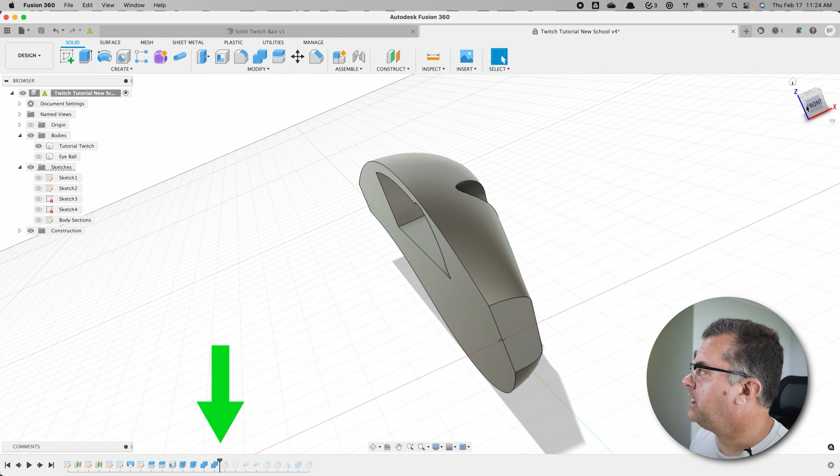Let's go. I think I want to come back all the way basically before that eyeball gets in there. So sometimes this is tricky because you have to move stuff around. My eyeball comes in here, but I combined all the bodies back together at this step. And what I want is the bodies combined, but I don't want the eyeball there.

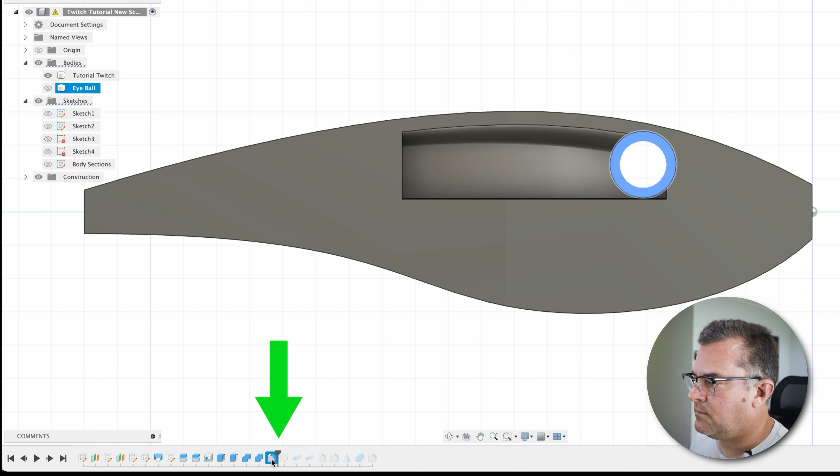So let me show you a little trick you can do. I'm gonna come up past this fillet area here, take this, and drag it to there. Now what I've done is I've switched these things around, so I'm actually combining the body here and then I take the eyeball out there. So what I can do now is come in here, and I'm at the point I want to.

Now, I just caution about moving things too dramatically around the timeline. You can really mess things up, but usually if the steps aren't dependent on another step you're getting out of order, it'll work just fine. Just use caution. So now I'm here, I don't have my eye in there, which is cool, and we're ready to go.

So what I wanna do is create a sketch on the face of the body. I'm gonna make an offset, select the outline of the lure body, and offset in probably like -0.4, just slightly, trying to keep everything inside that body because we're gonna be doing some extrudes and we don't want to come outside the boundaries of this object, since we're gonna extrude from object. You'll see, okay, that's good.

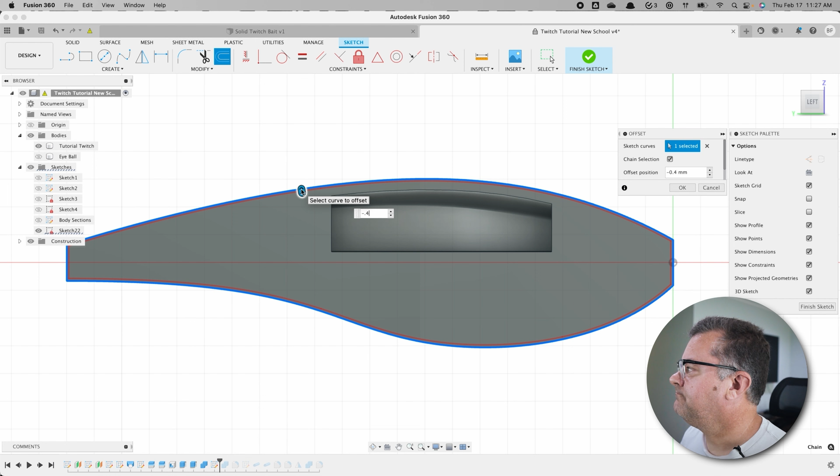Now I can actually turn off that, so I just have this sketch. So now we're gonna mainly focus on the head section first. I like to start by defining the back boundary, how far down the lure that head section goes, and then I'll add my details in there.

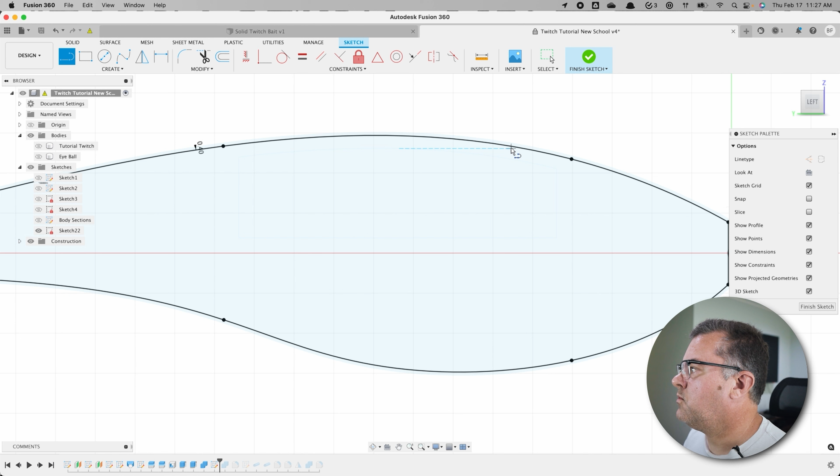I've been getting into a more angular head design. So I'm popping back on this body, and I just know my eye is kind of right here in this front section, so I want to keep that in mind because I want the eyeball to be inside the head. I'm just gonna go super simple here and make that kind of section, and then we're gonna start adding our details here.

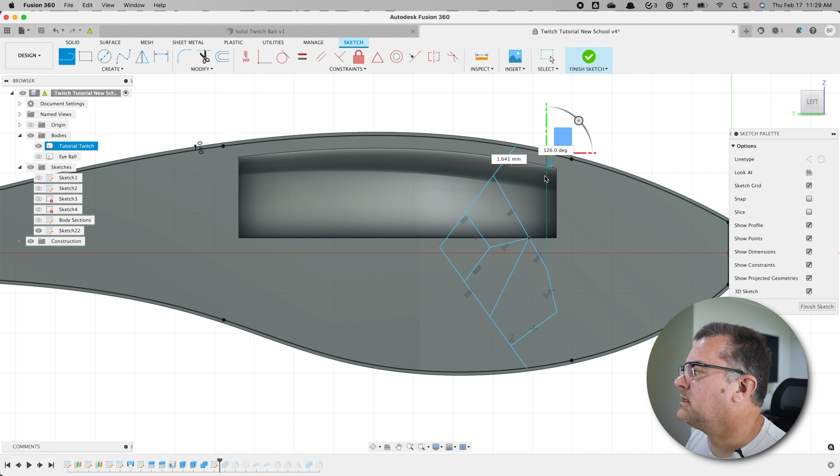Again guys, this is all about art and making what you wanna make, so don't get too hung up on the way I'm doing it here today. It's just kind of a phase I'm in — angular gill plates, yeah, deal with it. You can of course make these any shape you want, they can be rounded, whatever you want, it's all you. If you're following along at home, I'd just kind of chill out for a bit till you see what we're gonna do, because it'll make much more sense once you see how we're gonna use these things.

I'm gonna keep them big and chunky. I don't like to put super tiny little details in my lure designs, but if you do, you can go absolutely crazy here. But again, I'd suggest you watch my process before you get too crazy.

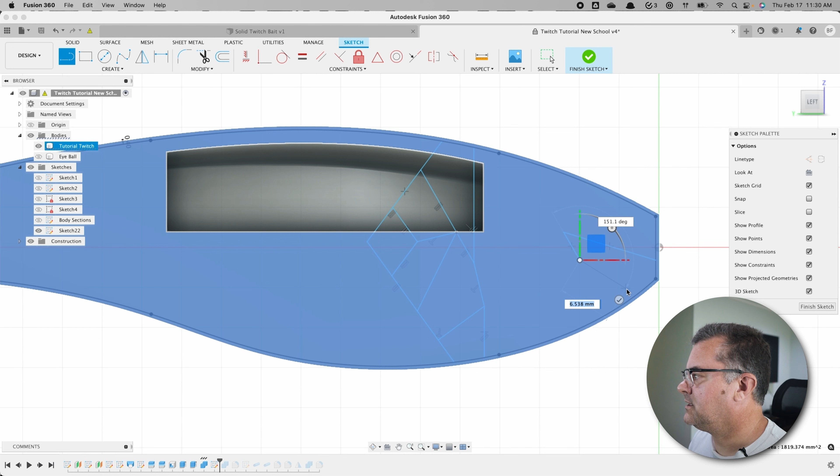All right, let's put a mouth on. I don't usually do mouths, but let's just add one for the fun of it. Can I make one that looks scary? Probably not, I'm not good at that stuff. But we're staying with an angular pattern. Okay, that looks good. Let's add a fin here — we're gonna go super basic.

Okay, again, keeping it simple, bro. And then I'm gonna do a lateral line. This lateral line does a couple things. One, it's gonna be part of the design on the lure body, and I'm also going to use it to split the lure when I start to do the body details.

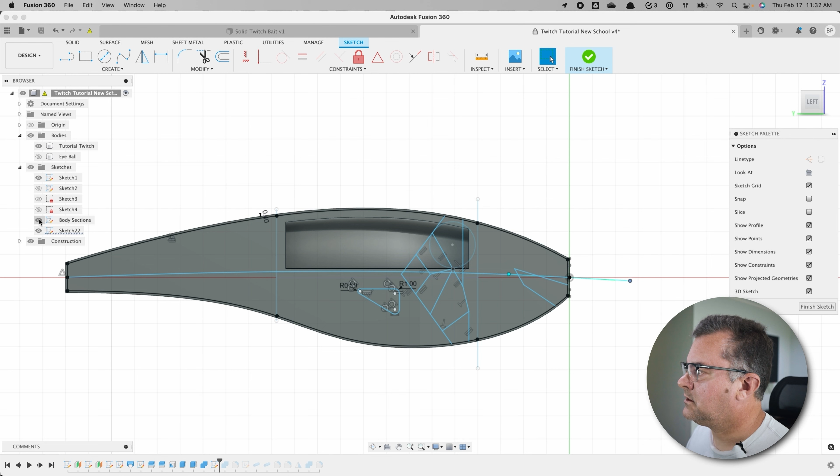All right, fit point spline here, there to there, and give it just a little bit of a curve. You can do whatever you want to here, right? It's your lure, bro, you do you. Now I should have labeled my eye sketch in here somewhere. I don't know if I have it. Yeah, there it is, so I can see where my eye is gonna be. And that looks okay-ish. We'll give it a roll.

All right, now we can finish sketch and we're gonna extrude. So I'm gonna hit the E key on my keyboard and we're actually going to extrude all of these sections in the head area first. Again, this is where adding too many details can really drive you crazy.

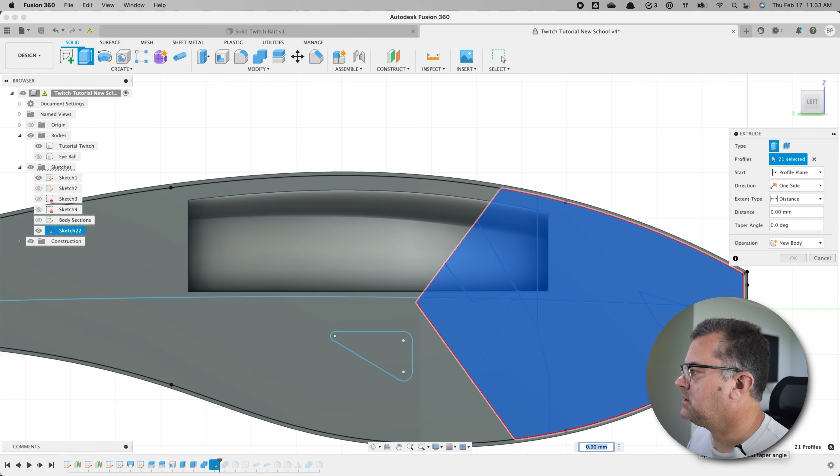All right, got all of those sections done. So there's two ways you can approach this. If you want to create a kind of separate shape from the main lure shape for your head, you can extrude this from the profile plane. And I'll show you what that does real quick.

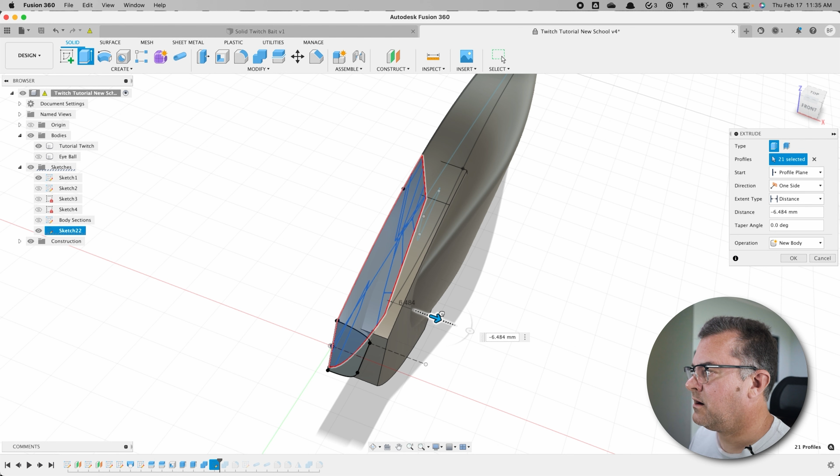So if I extrude this out, I just grab this, move it over, and I want to do a new body. We're going to do a new body on a lot of stuff. And so what I kind of look for here, and it's kind of difficult to see, is you want to keep it roughly in the same nose width here. We have some play since we made a new body to change that angle of this. And so this is not a super scientific way to do things, so you just kind of have to guess here. You don't want to go way out here probably, but you want to kind of go somewhere in betweenish, if you will.

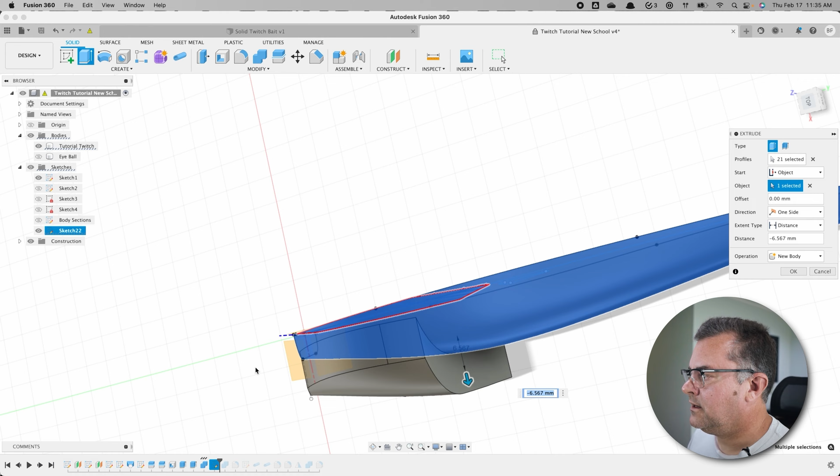Okay, but let me show you the other thing to do. The other way to do it is instead of profile plane, do object and select this object. Now look, what that does is it keeps all of the curvature of the body. Let me see if I can get a good angle here. So we keep the curvature of the body and the relative shape. And obviously we don't want it to be that big. You usually want it to be, oh man, you kind of have to play with it, but usually not much more than 1.

Now we have to do negative because we drew on this face back here. If we drew on the plane, this would actually be a positive number. So you can kind of tell when you're doing it if it's going the right way or the wrong way, but just wanted to let you know.

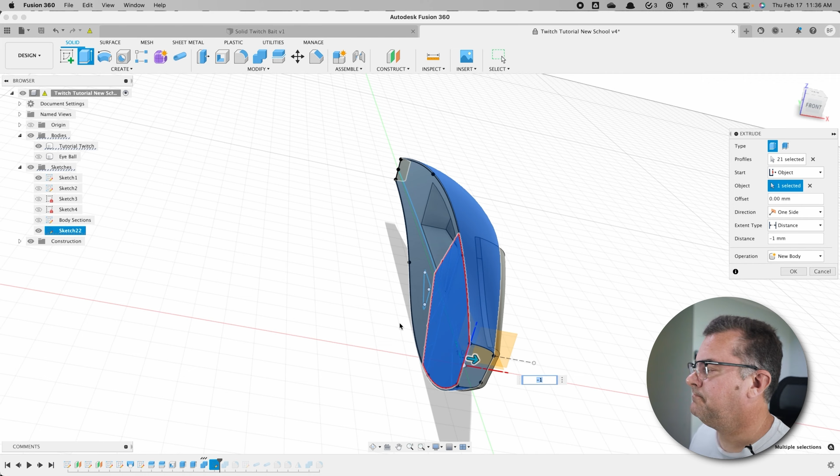Okay, so now we have this kind of little guy here. And one thing that this method gets you that's a little bit funky is this edge up here, but we can take care of that, I'll show you how. And the most important thing here is the new body. All right, now I have this body 59. I'm gonna rename it to head because that'll make it easy later.

Okay, now let me show you something that I learned recently that kind of blew my mind. If we click move copy and we select faces, you can actually select this face right here. You select the top view, grab this and move this around. That's pretty cool, bro. And that's really why we made this a new body.

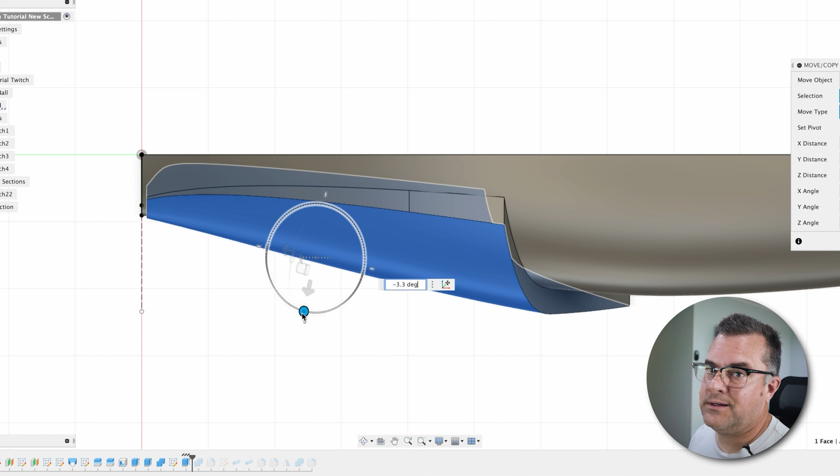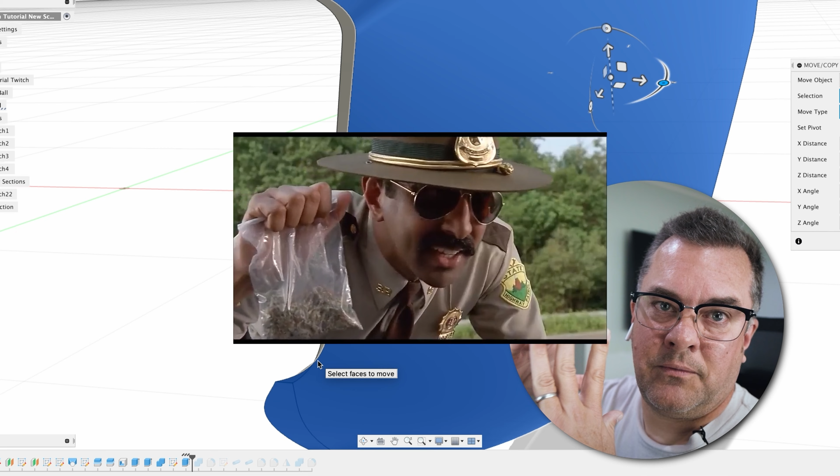If we would have joined it together at that point, you would run into all kinds of problems at this point. So you can't go too far past where it starts to crush this edge right here. And what I mean by, let's turn off the main body here. So this front edge can't go past itself, right? It can't fold over itself. Fusion doesn't like when that happens, and it won't kind of adjust, if you will. Like what I would want to happen is it just keeps collapsing and moving up the seam and doesn't fail. It just gets to a certain point and stops.

Officer Rabbit and I are going to stand here while you three smoke the whole bag.

And so what this does is now we've widened the back, we've flattened down the front, and we say okay. And it gets this edge much, much closer. And again, we have room to play with this, so don't freak out yet.

Okay, so now what we want to do is we want to turn back on our... actually, you know what I want to do is I want to rename this to details because that will help us later. And we want to turn that sketch back on and we can turn off our body sketch. And now we start building the gill plate section. So we're going to hit E for extrude. And I like to start kind of at the ones closest to the front of the bait, so we'll select this one.

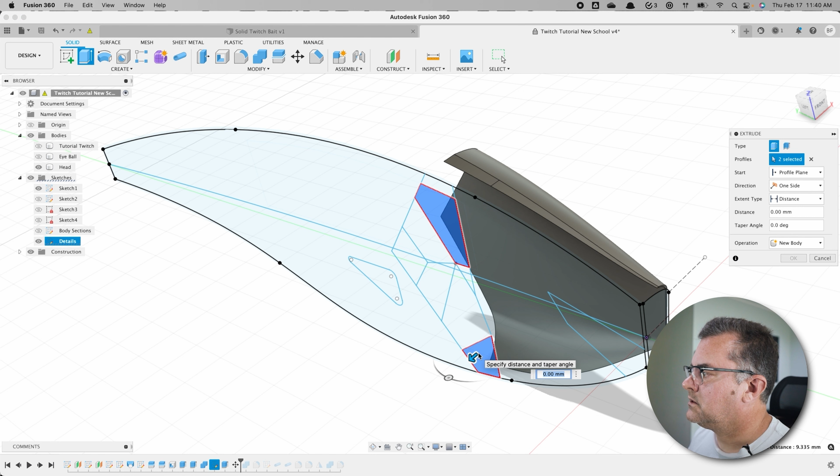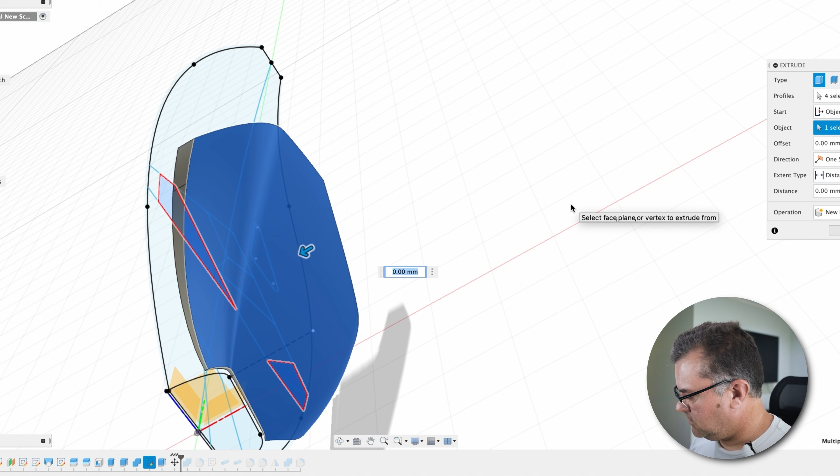Let's select this one and this one. Actually, let's make this whole section one, because if you made a bunch of little ones, it gets tricky. Then we're going from object, select this object, and our distance is going to be - you want a stair step, with the ones closest to the front of the lure lower, and as we go back they get a little higher. So this is probably gonna be negative 0.4. You can see they just come out from there.

We actually want to make these new body again, and I'll show you why in a sec. Remember that 0.4. Now we're just going to keep going down the line, so we have these sections here and in this section. We're going to do object, select this object, and let's do negative 0.6 maybe, and new body. We'll say okay - you can see where we're going.

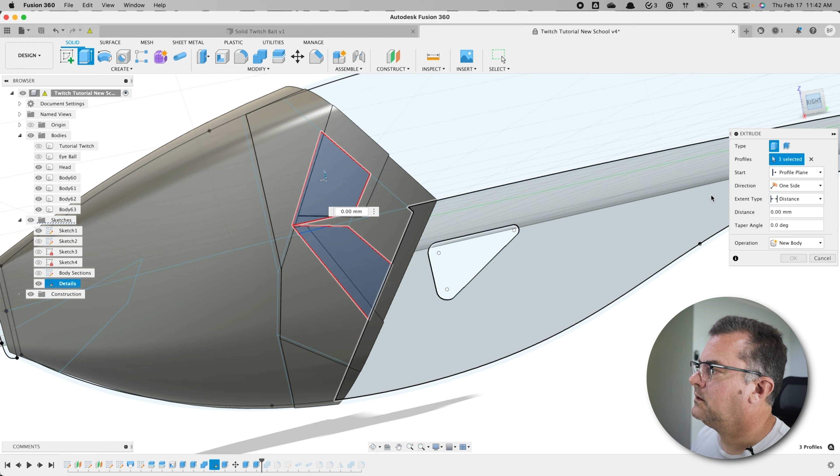So we have these lower sections that I did here, and then these new bigger sections here. Alright, we're gonna keep going - extrude this, this, this maybe. I think that'd be kind of cool. So we can come back to the front here, or the right, excuse me. Take a look at that. Okay, we already popped that one out.

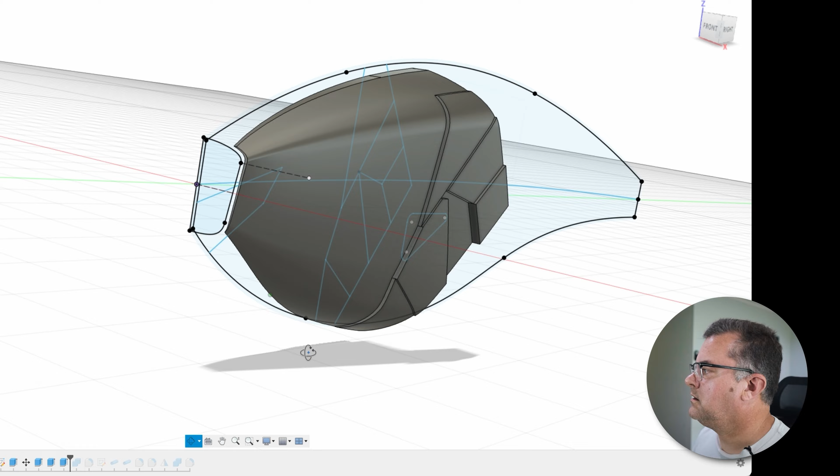I think we just want to do this diamond section here, right? Not this section. Okay, so from object, select that object, and let's do negative 0.9. That's good, we're gonna do new body, click OK. Alright, so we got this little section here - that's this guy, right, that I forgot to do. Just the same process: extrude, object, negative 0.85, new body.

Alright, so let's make it a little bit easier. Now I have all of these bodies over here, and the reason we made them new bodies is to make this part a little bit easier. I'm gonna come in here, turn off my head section, grab this edge, and hit fillet, maybe 0.5 - just round these edges over, at least the leading edge here, the edge that's closest to the head.

Kind of just like that, and you could obviously do this on all of these other edges if you want to. Because they are individual bodies, it makes it a heck of a lot easier to do this. If this was all one big joined body, Fusion gets super confused because you have too many surfaces involved, and all kinds of wackiness happens. So let's not do that.

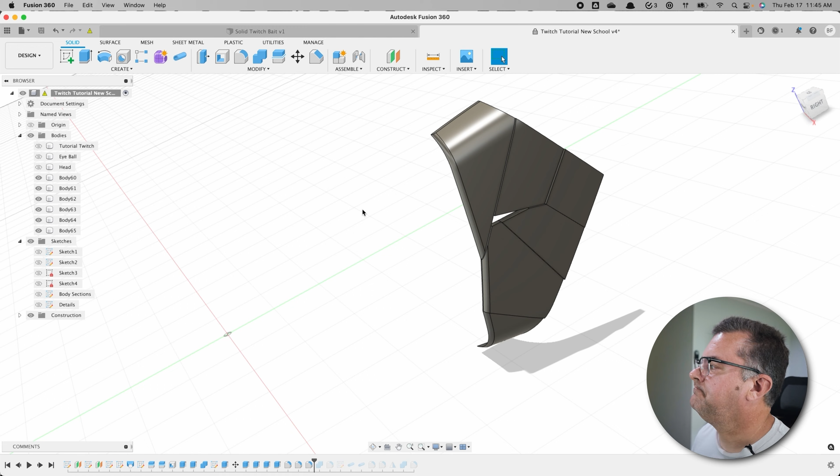Okay, and I actually think what I'm gonna do is - I like this, I kind of like that little missing section in there, I think it's cool. I'm actually just gonna combine all of these guys together, join them, don't want to keep tools, and we're gonna call this gills.

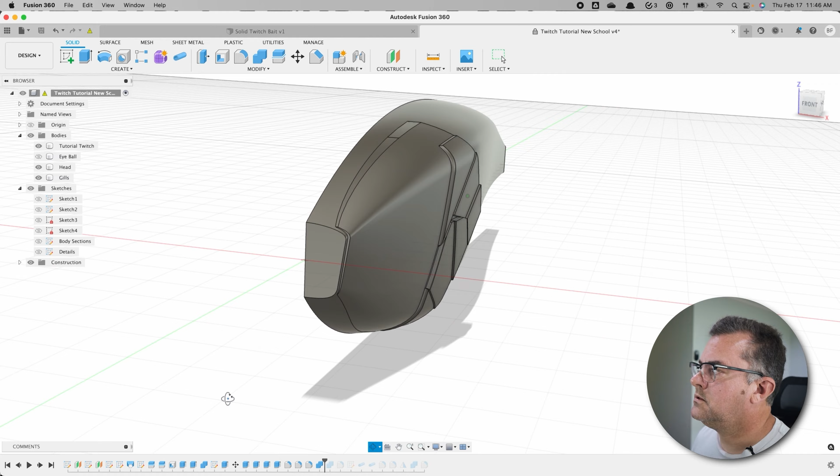So we turn back on our head - there's the head - and we turn back on the tutorial twitch. That's what we're looking like now, right? Not too bad, not too bad. Okay, pretty cool, pretty cool. Why am I talking like that? It's ridiculous. Okay, so let's keep going.

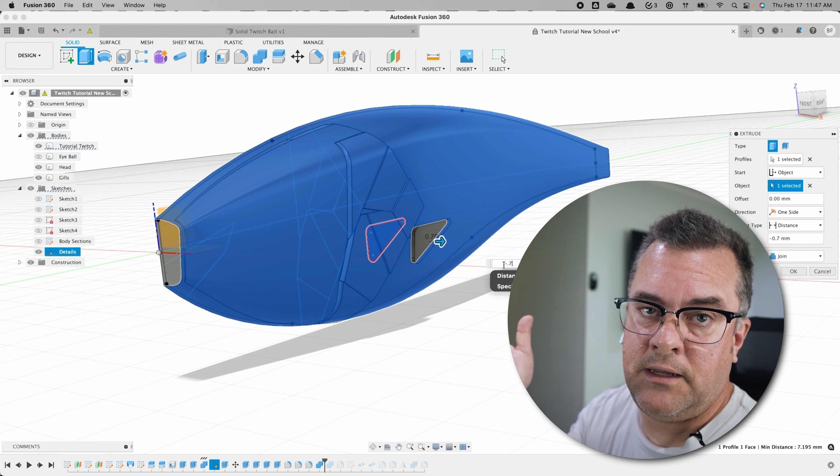Let's do an easy one here. Let's turn back on our details. Let's extrude, do this guy. We're gonna go from object - see a pattern coming here - and we're gonna do negative 0.7. If you haven't figured it out yet, I didn't make it clear at the beginning, that distance is how far out from the body this particular feature is going to be. It's up to you how big or small you want to make it, but that's what this is for.

Alright, we want to make a new body again and click OK. Then we're going to angle this out just like we did before with our move command - faces, select this face, and just give it a little bit of a tweak. You know, you can play with this all day long, so let's keep it about here. Alright, I think that looks good.

And then one other thing you can do, that we can't do if we join these together, is I can actually go to move bodies, select this, and just kind of bump it back into the lure a bit more, right? So I can even have finer control over how I want this to look. I mean, that's the most boring fin ever, but you get the idea.

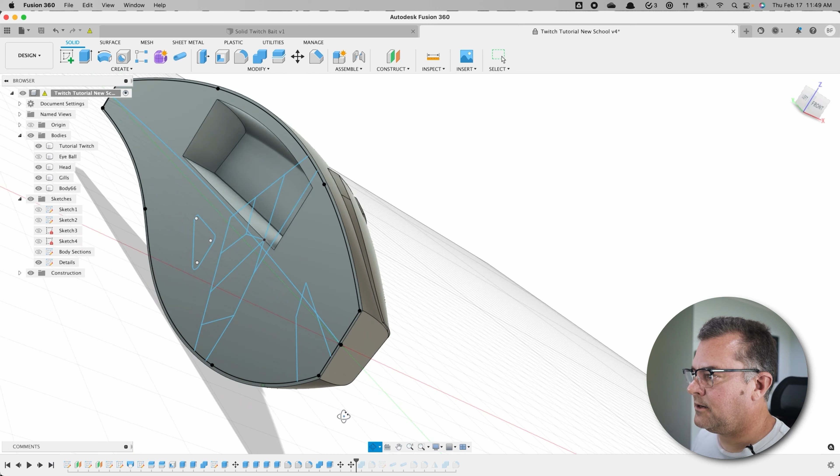Alright, and let's see how this mouth looks now. Like I said, I'm pretty terrible at mouths, I don't do a lot of mouths. We're gonna do object, select our head here, negative 0.5 maybe. Oh, we ran into a bit of a problem there, because this head section actually got shrunken in, and so this outline is outside that head section.

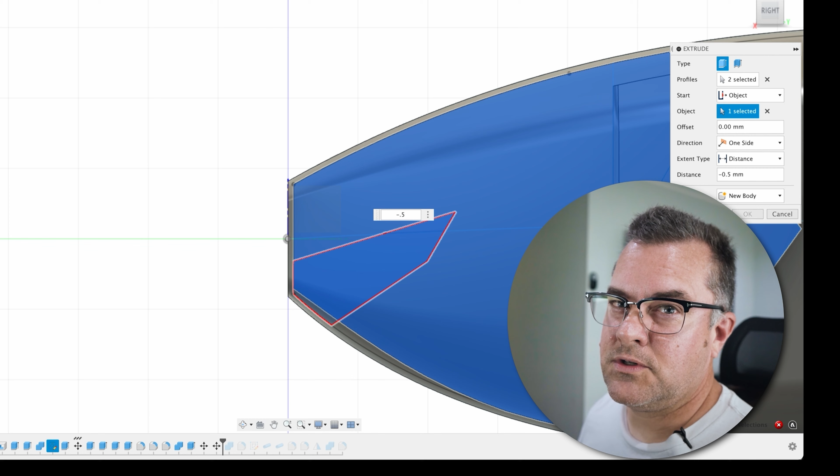So we can solve that pretty easily later, so we're gonna skip this step right now. That's one of the problems you can run into with this technique, but again, it's easily solvable. It's just more of a sequencing issue.

All right, so now we got our head on there. This is pretty far out actually. What you can do is move bodies, select the head and the gills together and move them all in there. That looks pretty good. We're gonna change the top here too, but take your time, figure out what you want this to look like and just move it into place.

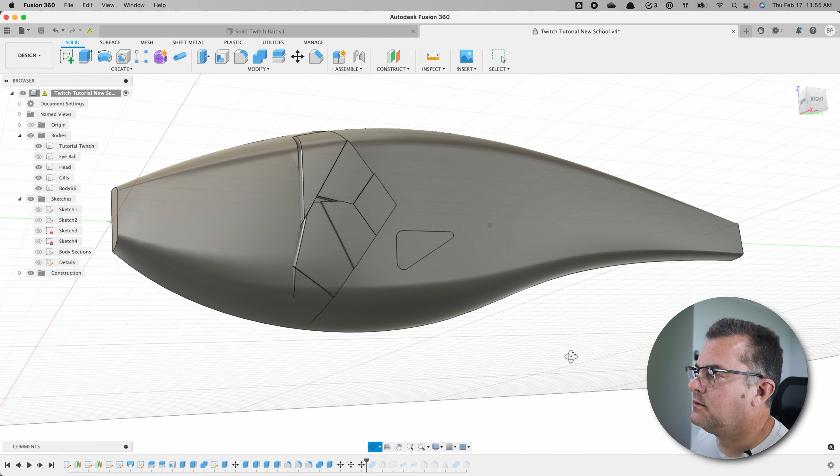So it might be hard to see, but there's this little edge here that flows back. That's the original part of the lure kind of taking over. I still got plenty of stuff out there, I'm good there, click OK. So now we have kind of a much more natural fade in, if you will.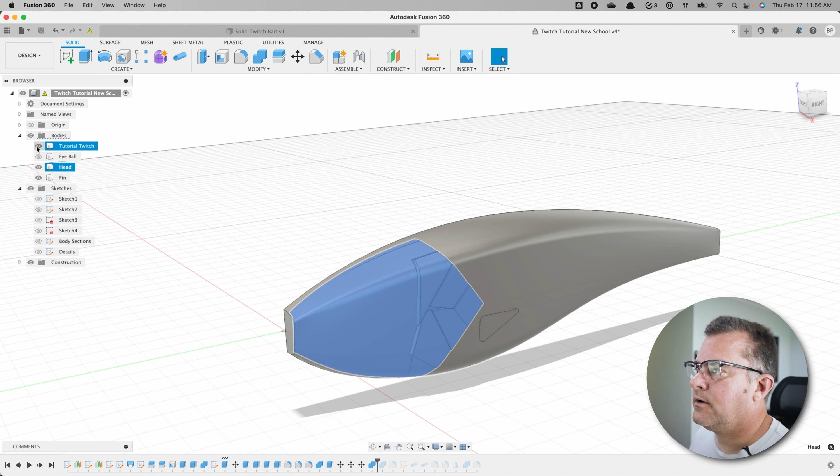What I want to do is, I don't really like this, the way it wraps up here. The bottom actually came out okay, I'm not too terrible with that, that looks all right, but I don't like this up here.

So the quick and dirty way to get rid of that is just to create a sketch on this plane, and we're just going to draw a line. It goes about right there. Again, it's art, people. Finish sketch, then we're going to use the split body command. We're going to split this body, use this tool and click OK.

Okay, so now I have head 1, which is the main head, and the top half. If I just hide this body, bring our tutorial twitch back on, you can see now that kind of fades in a little better, right? So you can adjust that however you want.

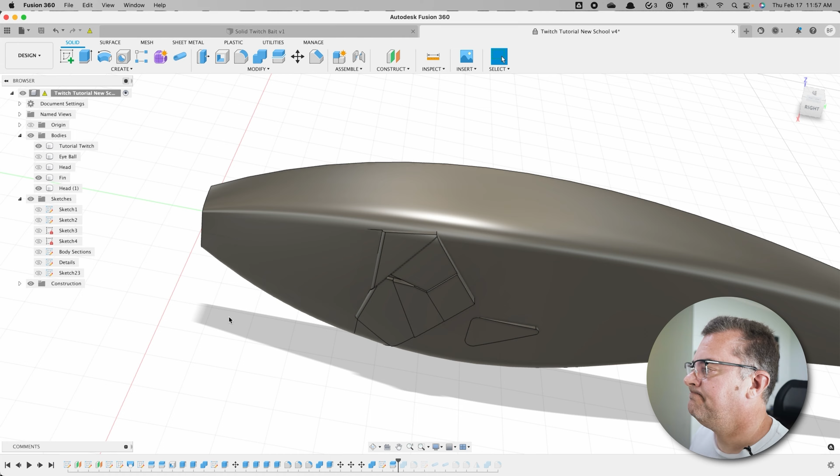You could use a curve splitting tool if you want to. Anyway, it works, right? Or you could leave it like it was before, totally up to you, bro. All right, that fin's really pathetic, but okay.

So now let's get back to our mouth. Let's add the details, sketch back in, hit the extrude button, click this, and we're going to hide the head thing here, from object, boom.

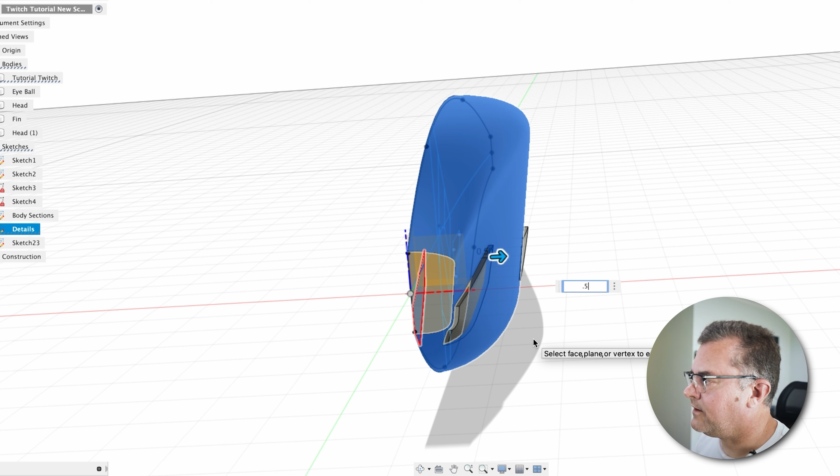Again, let's just say negative 0.5 maybe? Oh no, we don't want negative 0.5, we actually want 0.5, don't we? Duh. And we do want that to cut, and then we just want to be done. All right, that's pretty ghetto, bro, but you get the point.

If you wanted to, you could get in here and fine tune your sketch. You can go back to your details sketch and edit it, and basically just add a line maybe here to there. And then when we go to our extrude, we'll just edit feature, and we want to make sure we unselect that bottom part, select that, click cut, okay.

All right, that almost looks like an eyeball, but you get the point, right? We can just cut it out from there and we're good.

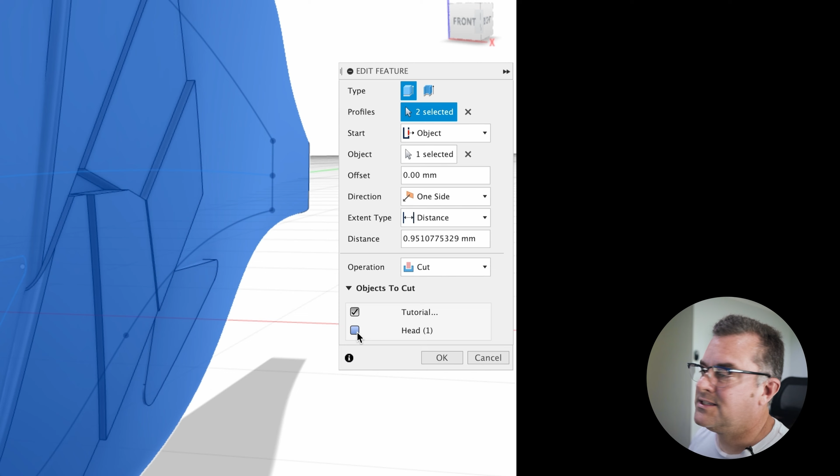So I don't know if you can tell, but in here we have, see how it's kind of shaded? We actually have the head thing poking through. So when you come over here, objects to cut, pull that down and you can see all the things that the profile actually goes through. We actually want it to cut that head section as well, right? So you can use this to only cut certain parts. It's pretty powerful once you get used to using it.

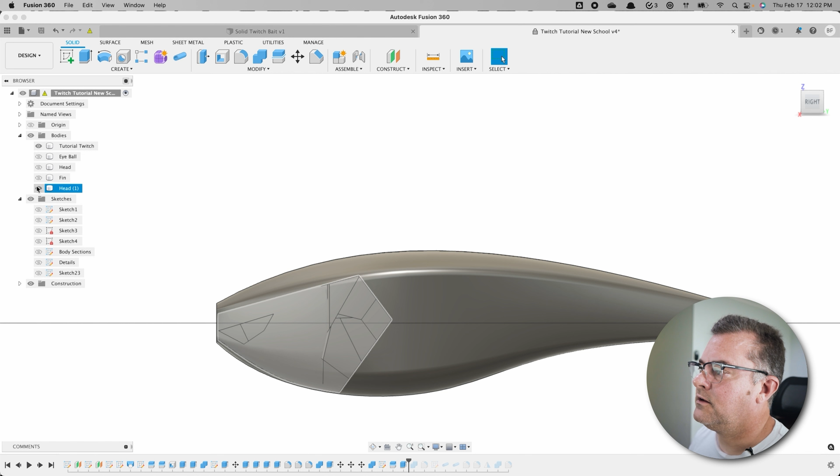I apologize, that's a terrible, terrible mouth. Okay, so now what we're gonna do is I'm actually going to combine the main body. So I'm gonna turn off our fin and turn off our head for now. And we're gonna split the head off and split the body into multiple pieces to add our other details.

So if we click back on this sketch and we click split body, click that body, my splitting tool is gonna be this outside drawing here, right? And click OK. All right, so now we can turn that off.

So we got the main head of the lure out of the way, and we're gonna split it again. This body, the split tool is gonna be the lateral line we put in there, and click OK. And we wanna get that detail sketch out of the way, and then we wanna figure out what's what here.

Okay, that's the bottom. So I just renamed that Twitch bottom and Twitch top.

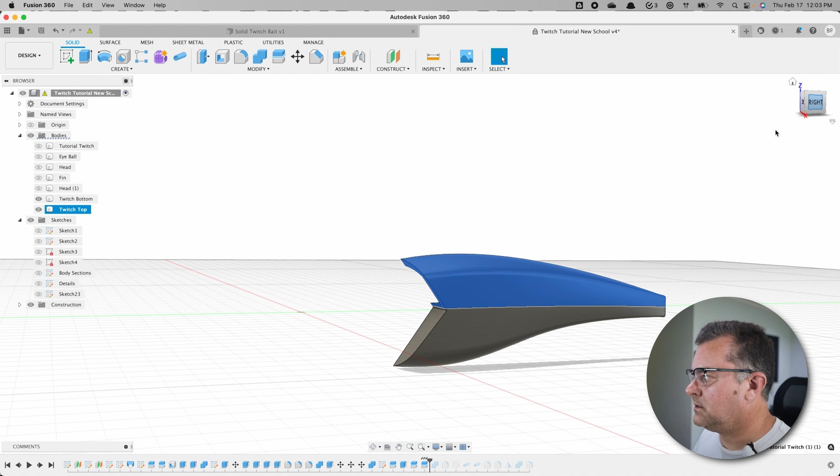Now what we're gonna do is a hatch pattern across these guys. I want the bottom to be just these lines going that way, and on the top we're gonna do the hatch. So we'll start with the bottom.

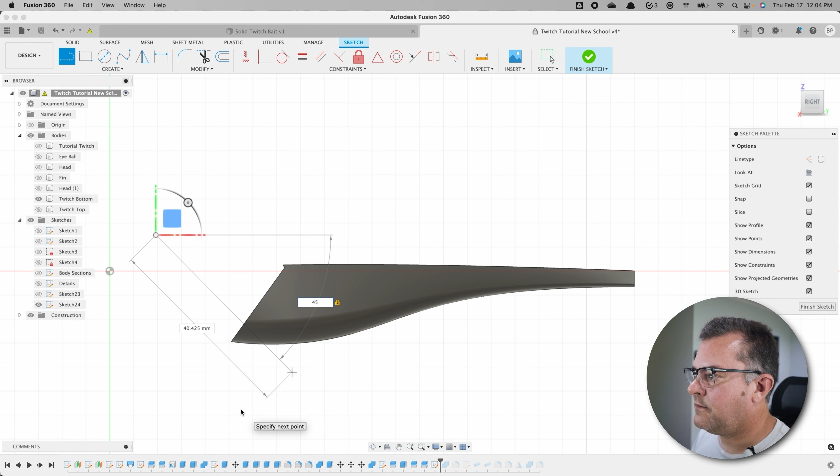We're gonna make a sketch, and I want the lines going at an angle front to back here. Just start them, make sure they're long enough, and you want them to go over, right? I think I wanted a 45-degree angle. Move them back to before.

We're gonna create a rectangular pattern, going all the way past the end. How many we need is kind of up to you, right? The lines represent where these hatch marks are gonna go, so you can add more or less, you do you. Click OK, and finish sketch.

Now it gets a bit tedious. We're gonna create another sketch on that plane, a project to surface, faces, this face. The curves are all these lines along vector, and for projection direction you want this back and forth, okay? You can see it's working because you have these red lines where you want these cutouts to be. You can ignore the warning, it's just because we drew over the face, but we want to make sure we had all of the body covered. Click OK and finish sketch.

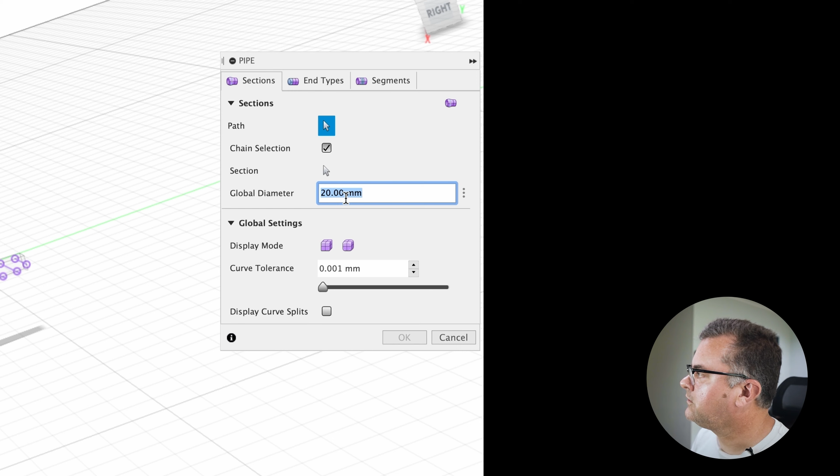Now we can turn off this sketch, and the easiest way I found to do this is actually a little bit of a hack. We go to create form, create pipe. I like to change this global diameter first - we'll do 0.5 millimeters in the path. Just left select all of those guys, and we got ribs. Click OK and click finish form.

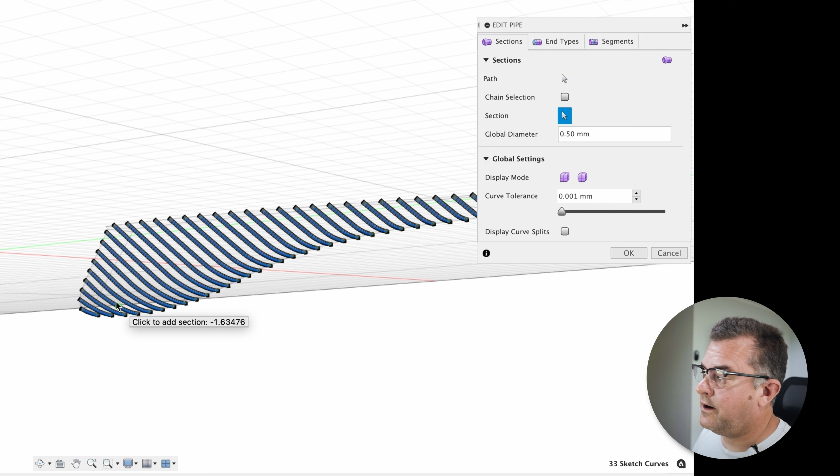Now you'll see I got a bazillion bodies here. Oops, I made a mistake, sorry. Let's edit this again and edit the pipe. I messed up right there because I got a little too excited and didn't close my pipes. So the end we want to be - spikes are fine, spikes or square, doesn't really matter. Then we want our mode to be round. That looks much better. You want them closed because we want them to be actual bodies, not just surface bodies. So now we click OK and finish.

So we still end up with roughly the same thing, right? We end up with all of these bodies, but now what you can do is, if you want sticky-outy ribs, you can just leave them as is and combine them together with a join, or what I'm gonna do is cut them out.

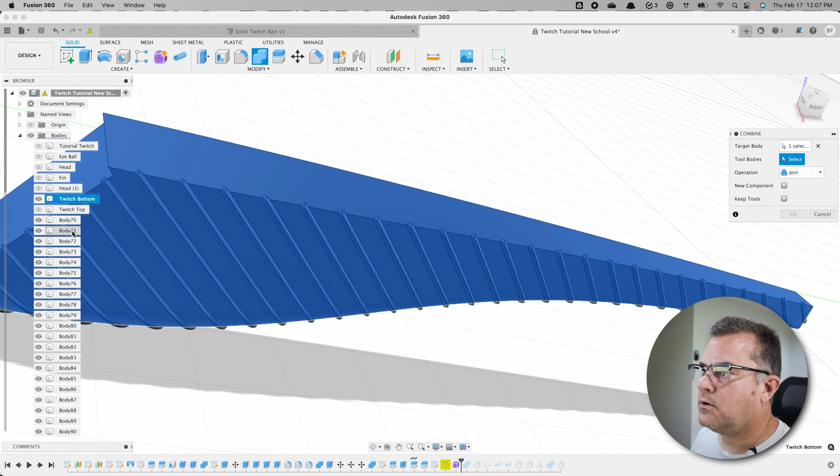So this process is the same. I click combine, our target body is the Twitch bottom. Our tool bodies are all of these guys, so I can click one, hold down the shift key, click the other. Again, if I want sticky-outy ribs I can click join, but I want cut, and it's going to cut them all out. Oops, I need to add those other ones here - you obviously want to make sure you have all of them selected. Fusion will hate you now. All right, once we got them all selected, we now have our hatch pattern, or just kind of scratches, in this particular lure section here.

So let's move on to the top. I'm just gonna turn on the top, the right side here, looking at the right. Actually what I think I want to do here is not go all the way over the top with this hatch pattern - I just want to keep it to this part of the body, kind of the front face. I don't mind it wrapping around the bottom, because the bottom is a little bit thinner. I don't know, I'm just weird - I just don't like it wrapping around the top for some reason.

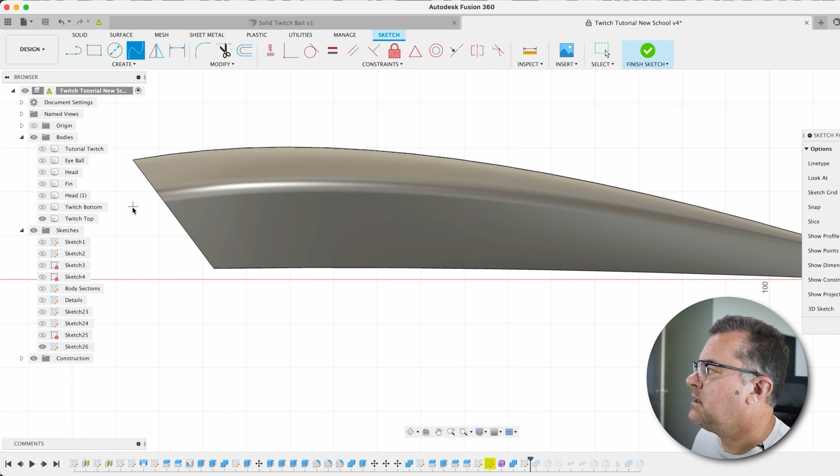Again, you do you. But what I'm gonna do is draw a sketch here on this plane, a fit point spline, because you guessed it, we're just gonna chop this bad boy up. I'm just gonna kind of follow the curve here - I'll put it there, hit the check mark, grab this handle and just kind of work the curve. You can move this up just a hair. We don't need to make this perfect, just close enough. Well, you might need to make it perfect - I don't need to make it perfect.

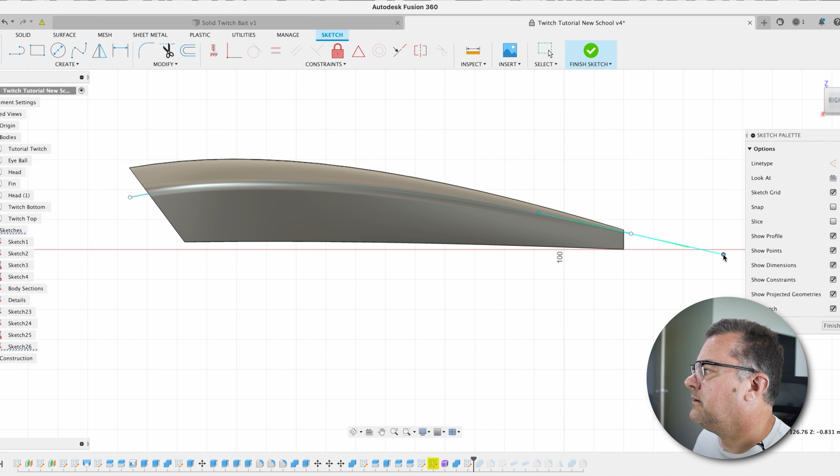Again, we're just gonna use this to cut the top half of this body off because I don't want the sketch points on there. So split body, split tool, select that, click OK. Now I have a top one, hide top, and I just have this little bitty section here.

We're gonna do basically the same thing we did with the one-way hatches, but as a diamond pattern now. So we're gonna draw a sketch on this plane, draw a line at 45 degrees, put the angle in first, that's what I didn't do last time. So we make sure that we're all the way past.

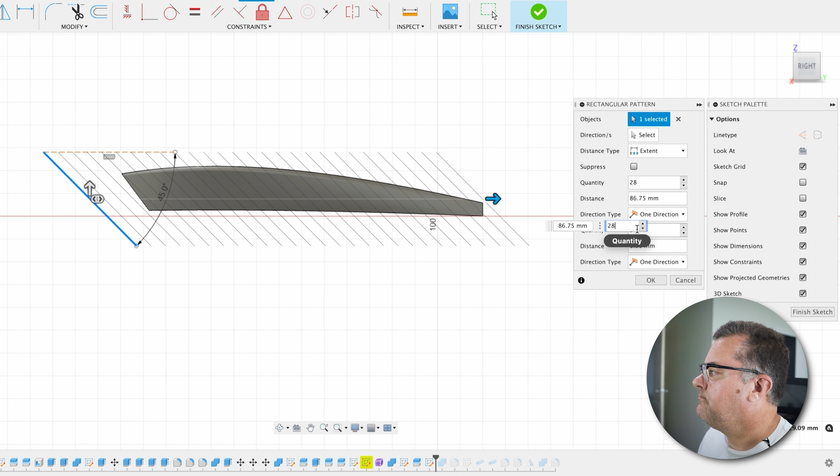We're gonna create a rectangular pattern on this guy, making sure we go past the end of the lure. And again, how many do we want? It would be great if I remember what I did last time, but we can make it different. We're cool like that. Click OK.

To make things easier, we're gonna actually do this in 2 separate sketches, and you'll see why in a minute. So we're gonna finish this sketch and create another sketch. One thing I wanna do is project this whole line and that point. Click OK. We're gonna draw another line.

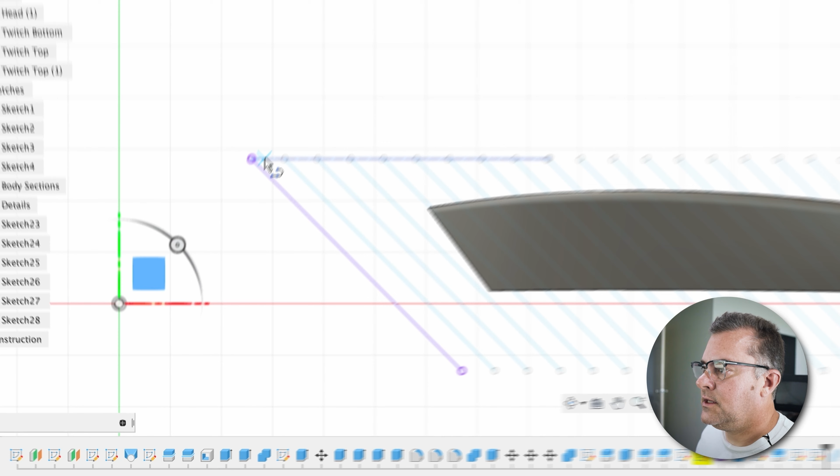I want it to be even with that line. We're gonna come down, my degrees are 135, which is basically 45 from 180. My other angle is 45, so we wanna keep them at the same angle. We're gonna come all the way down again, making sure that we're past the bottom of that body right there.

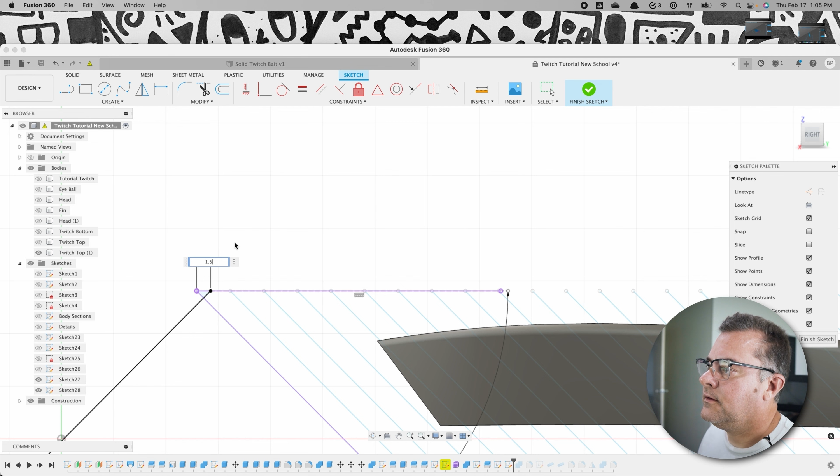Next thing I'm gonna do is dimension this to this, 1.5. Then I'm just gonna create a rectangular pattern again, making sure it's all the way over my body, and we do 30, just for now. Again, you can play with this all day long.

This is where your art comes in, smaller, bigger hatches, whatever you want. And we're gonna click Finish Sketch.

Now we're gonna do the same thing we did last time with our lines for our belly, but in 2 steps. I found this to be the best way, because if you try to do them all in one sketch using the pipe command, it tries to connect those pipes together and you end up with all kinds of problems with pipes not being created correctly, and it's just a mess. So even though it's longer and more tedious, this is the best way to do it in my book.

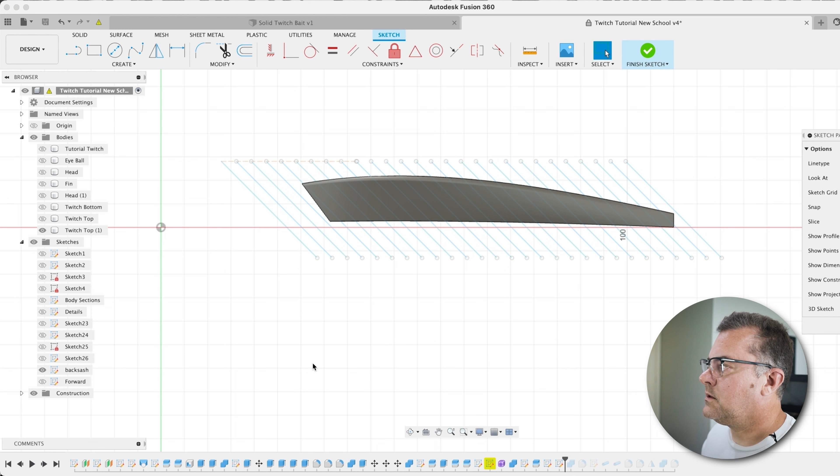Now what we wanna do is, I'm just gonna relabel these because it'll be easier. I think that's a backslash, and this one is forward. Let's hide the forwards, and now we're gonna create, project, to surface.

Sorry, I created a sketch there. Create a sketch and then project to surface, same thing we did last time. That's my face, these are my curves, and my vector is there.

Good God, man, it's taking forever. And then it failed. All right, let's try that again. Oh hey, hang on, that's weird, it actually worked. Okay, Fusion had a little hiccup there, but we're gonna keep moving forward.

I think I caused that hiccup because I failed to realize I was still in the other sketch before I projected. So you should end the sketch, create a new sketch, and then project. But it recovered, so we're gonna keep going.

Now that we have our projections here, we're gonna do exactly what we did last time when we created the hatches on the belly of the lure. We're just gonna do it in 2 separate steps. So we go create form, create pipe, kind of line it up so we can easily select these.

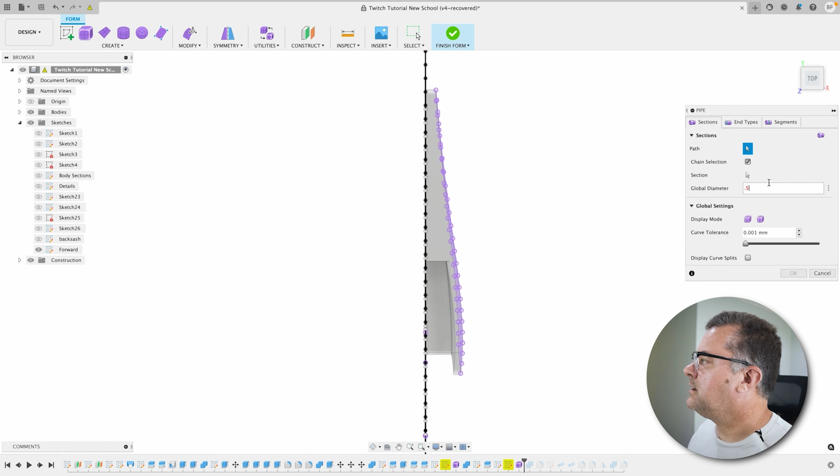I'm going to change my global diameter to 0.5. That's what we were using before, remembering things you do is helpful. Even making them a parameter so you don't have to remember them will be helpful. And we want to make sure we have square ends. Click OK, finish form, and then we have a whole bunch of bodies here.

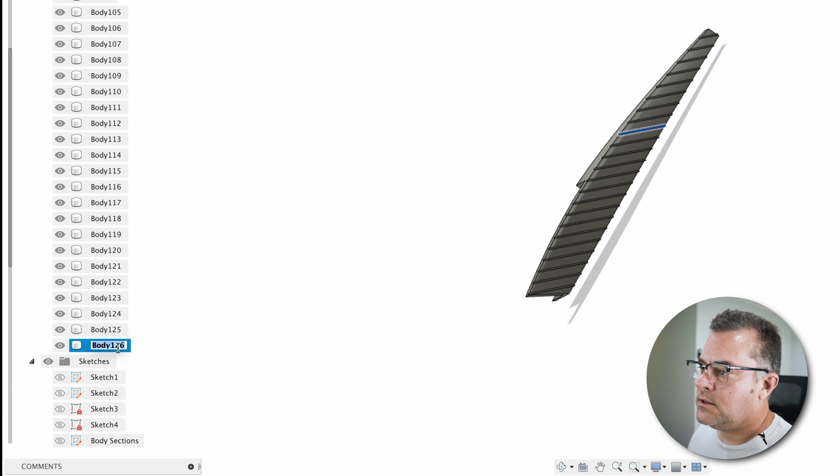So what I'm going to do is, these are my backs, so I'm just going to rename this back 1, and all the way down, rename this one back, whatever, 100, or back end. You'll see why we're doing that.

We're gonna go in and create our other pipes first, and then we're gonna do our cutting and removing. So if I end up needing to keep these separate for whatever reason, the backslashes and the forward slashes, I know what my relative range is. There's probably a better way to do this, but I don't know. If you know, leave me a comment.

So we actually want to hide all of these for now. We're gonna turn our forward slashes back on, and we're gonna do our projection again, same thing. Create a sketch here, project to surface, select this surface, select these curves. We don't want to select that projected curve.

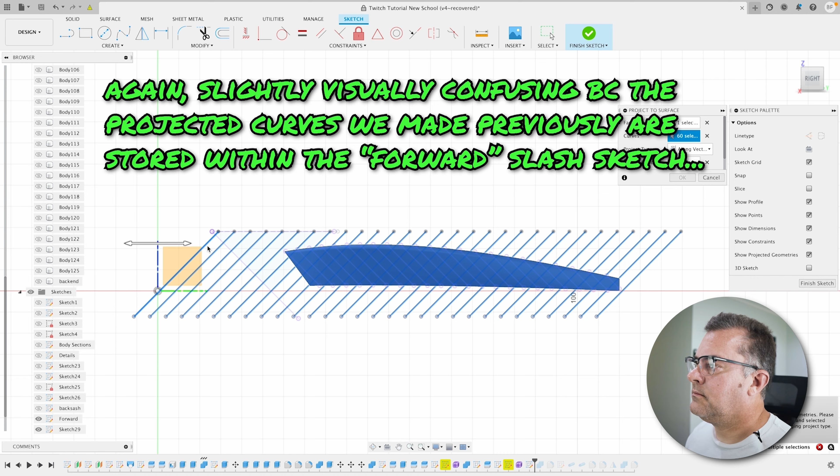Okay, certain curves can be projected. We don't really care, right? That's fine, we're gonna do along vector. Choose that.

Okay, so then we got those guys on there. Select OK. It'll give me a warning about them not all being there because I selected all these, but it's cool, bro, Fusion will deal with it. It's just gonna take a while to calculate. For the life of me, I don't know why this takes so long right now. It'll get done though.

All right, get a warning. That's cool. That took about 5 minutes, by the way. I got an M1 Mac. Fusion isn't the best thing to run on a Mac, but that's the way we're rolling.

Okay, finish sketch. We want to do the same thing we did before. Okay, so create form. We want to make sure we turn off that other sketch because we don't need it right now, and we just want to deal with this guy. Create pipe.

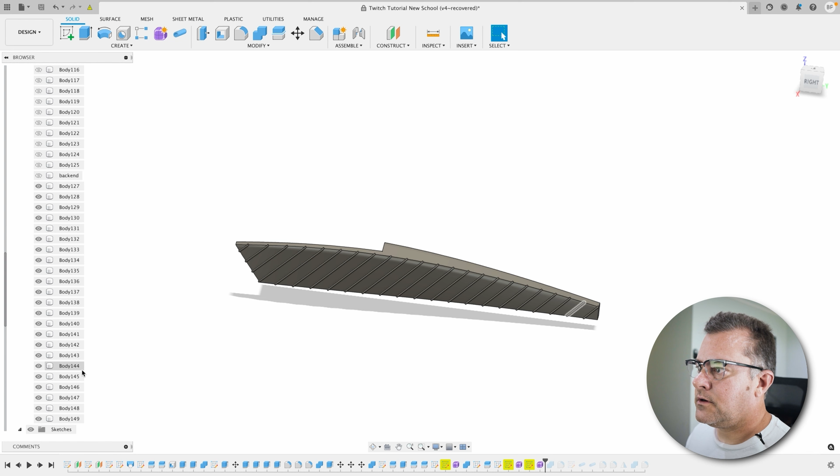0.5 in type square. All right, so now we did that, and you can see we have all of our front and back bodies here. So I'm gonna bring our back end ones, shift click all those and go to show hide. Okay, so now we have our cross pattern.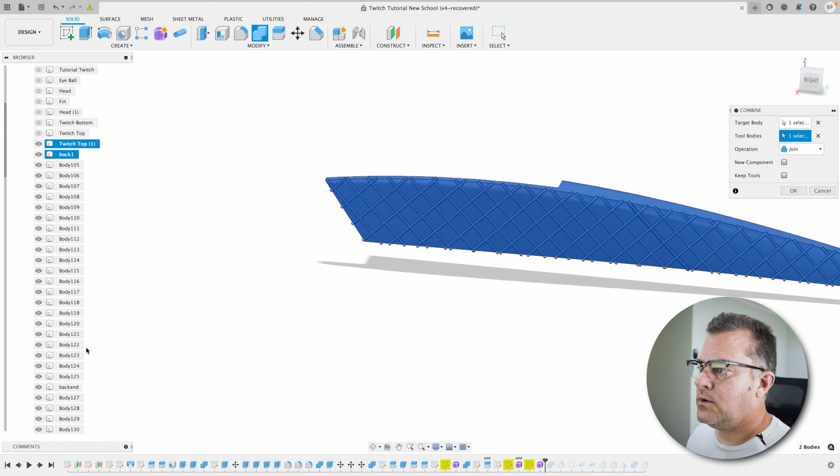And I'm gonna try to combine these together in one shot. This could fail miserably. So I click combine, target body is of course that guy, my tool bodies, I go from back one all the way down to the end there. And my operation is cut. And I definitely don't want to keep those tools around.

And there we go. Okay, now I know what some of you are saying: hey dude, couldn't you have done that all in one shot with projecting them and creating a pipe over the crosshatch? What happens when I do that is Fusion tries to bring these sections together and make kind of one solid pipe. So you don't get this 90-degree angle for one, and two, when you get into sections like this right here, where it comes really tight, Fusion sometimes doesn't create geometry that is valid and will fail and you won't be able to get out of there.

So I know this was a fairly long way to go to get some stupid crosshatch pattern, but it's really the way that I have found that has the absolute most chance for success.

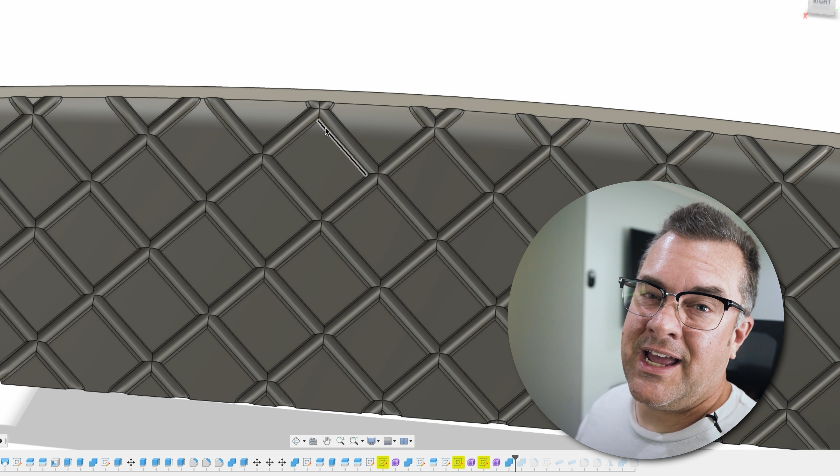All right, so now what we can do is start to bring our bodies back together and you can see what we got. Now the other thing I could have done is use this original sketch down here to match these up. You know, whatever, you could do that if you want. You just have to draw your sketch longer next time.

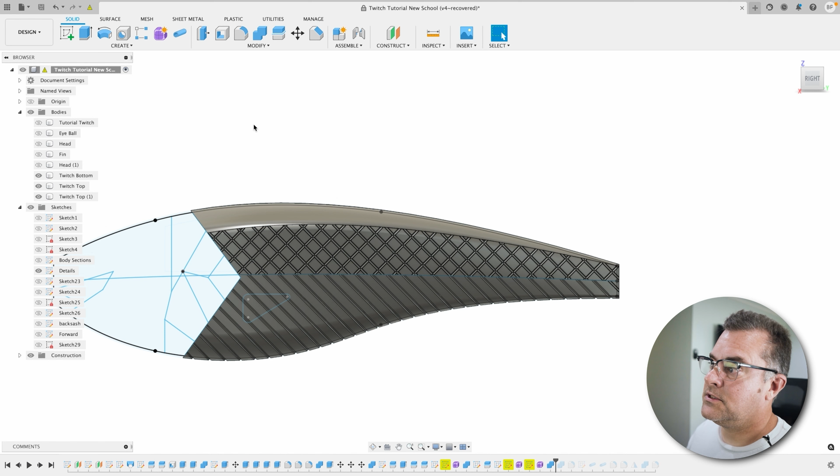But one thing we're gonna do is we're gonna go back to our details and we got one more thing we're gonna add. We're gonna add this lateral line in to really clean up that edge. So what we need to do first is we wanna combine all of these bodies together. So we click combine, and first one you click on, it doesn't matter from a technical standpoint, but whatever you click on first is what this thing's gonna be named.

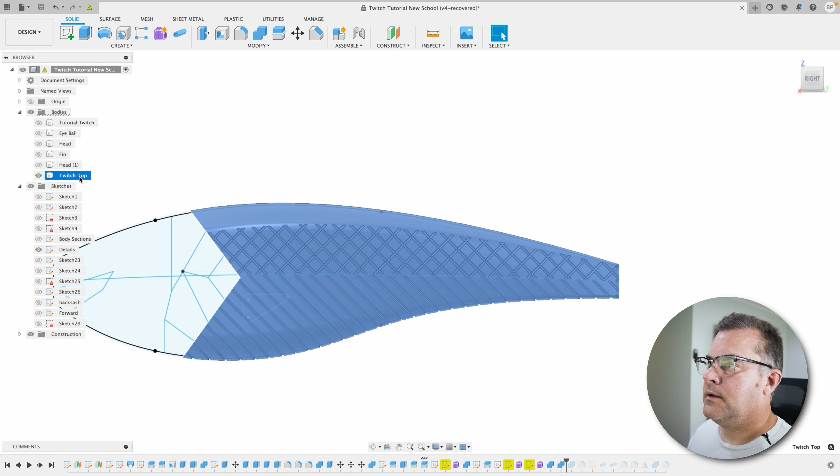So I'm just gonna call it Twitch top here. Tool bodies: Twitch bottom and Twitch top 1. We wanna make sure we are joining and we click on OK. Okay, so we're all back together. I'm just gonna actually rename this one to Twitch body. And then you guessed it, one last project.

Create a sketch, back plane. I'm gonna create project to surface. The faces are all of these faces in here. There's not a great way to go about this, so just select them, bro. It's okay, you wanna make sure you're only selecting the flat ones there, okay?

The curves are this guy, and a long vector, select one going across there. And you can see I got my red line right there. Okay, click OK, and wait again.

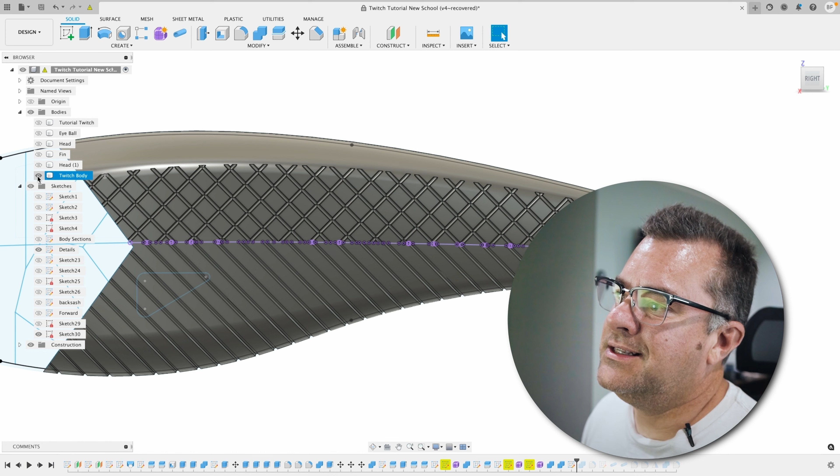All right guys, this is again yet another complication of doing scales and whatever you want to call these hatch lines this particular way, right? When we went and selected all of those faces to do our projection on, what we end up with is a line that is in like a bunch of different parts. So you can see that it has all these different segments.

So we can't use our pipe command. That would just be too easy now, wouldn't it? So we have to again go back into the forms editor, create the pipe, select all of these bad boys here.

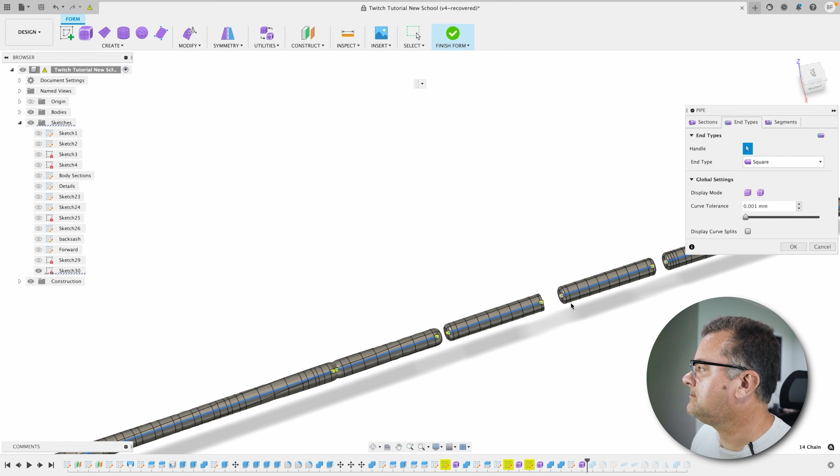Again, choose your size, make sure it's square ending. As you can see when we get in here, we have these gaps where the cross hatches came across. Let's bring our Twitch body back. Same deal - combine Twitch body, tools, all these little guys here, and cut. Not exactly the cleanest thing in the world, but it looks fine.

So you can see why I don't like to make a lot of super fine detailed hatches. You certainly can, it just is gonna take you a while and it's gonna really put a lot of strain on your computer. But you do you, bro.

All right, so we can bring back the fin. You can see the fin goes over the top as we hit it while I was going, that's good. What do we want? Head 1 here. Oh, we got head and that head part. Yeah, that looks good. And this old tutorial Twitch part, which was our original head, okay? And that actually looks like an eyeball, doesn't it? That's not good.

All right, what we want to do is combine all these back together. So tutorial twitch is the name of my deal, that's what I want it to end up being called. And then my tool bodies are all this stuff here that's visible. We of course want to join it all back up and click OK. And there we go, we are all done.

Now you can come in here and get a little bit cooler if you want, clean up these things, probably delete that. All right, we can delete this face if we want to. Sorry, I went back before that combine, and I'll come in here and look at that part. Actually, I don't want to combine that part.

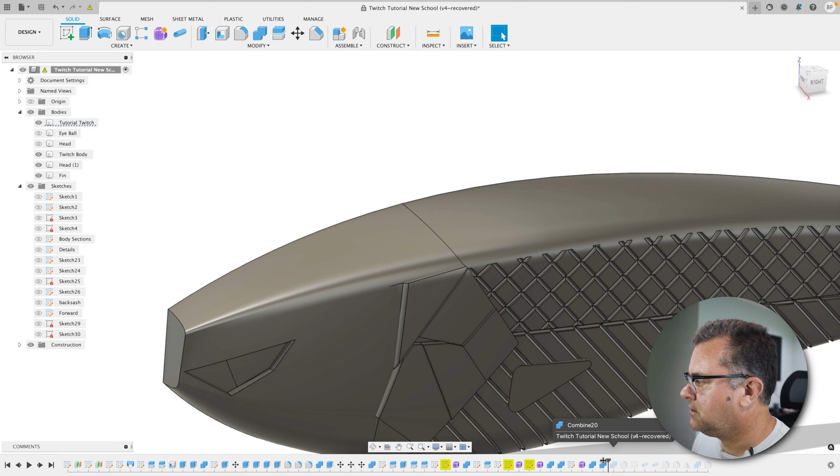My bad, bro. All right, so let's go forward, edit this feature, and my selections. I want this, and that. I want those three, not that other one. Sorry. Okay, and there we go. Pretty cool looking, except for the stupid mouth, bro. No me gusta. Okay, I just suppressed that mouth because it was bothering me.

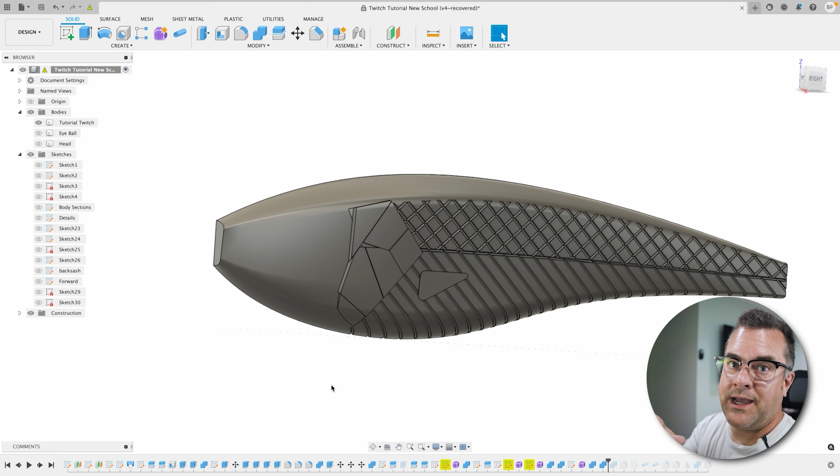You can do better, I know you can. So now that we went back in time on the timeline, right, we pulled that bad boy back to add in all these extra steps. And if we did everything right, we should be able to pull forward in the timeline and get back to where we were before this whole thing started.

Bro. We got a few problems. This is pretty normal, and I'll show you where we go and fix this.

So you can kind of see what's going on here. The eye didn't extend out past where this bump was. So the easiest thing to do there is just to knock that out, and we want to do that before we do our mirror. Then we can go back and find the sketch with that eyeball on it, which is this body section sketch. Turn that back on, hit E for extrude, grab that circle and just come all the way out with a cut. Okay, that'll cut that hole back open for us. Click OK. We destroyed a little bit of our work, but it'll still look cool.

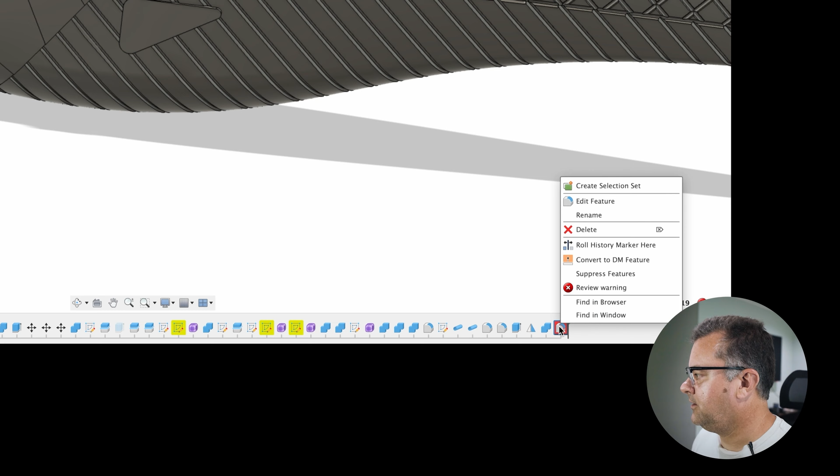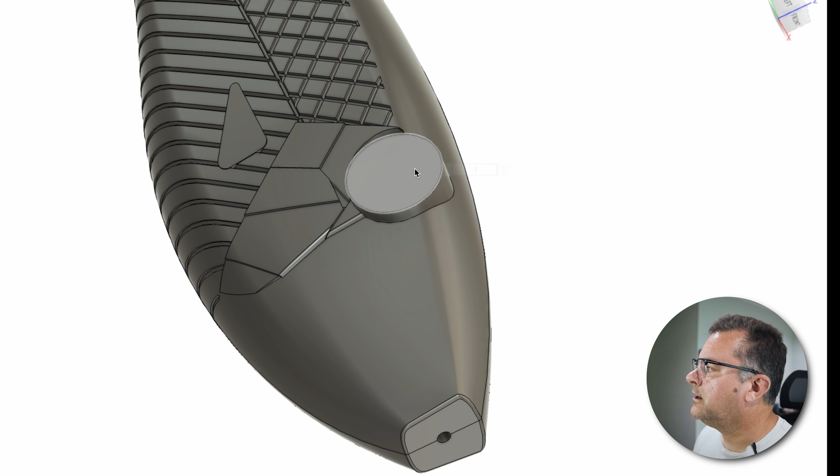And now we can pull forward, wait - another fillet error again here. Let's see, okay, that's on this edge here. So the problem is really because this is now combined with this body, and you can see I had my fillet after I added my combine. So the easy way to fix this is just pull this combine back. Actually, what we can do is delete that fillet, pull my timeline here - fillet 0.1, I think is what we were before - add that fillet in there, and then go to combine. So remember I mentioned earlier about things getting kind of weird and out of whack? That's one of those situations.

Okay guys, I know that's not the most amazingly beautiful lure you've ever seen, but the concepts are the same, right? It's just how much of an artist and how much time you want to spend, that's up to you to decide, right? I find that the fish don't really care, dude. They don't. I know you want to make stuff like this, but the fish don't care. So we're going to go ahead and print this and I'll show you the results.

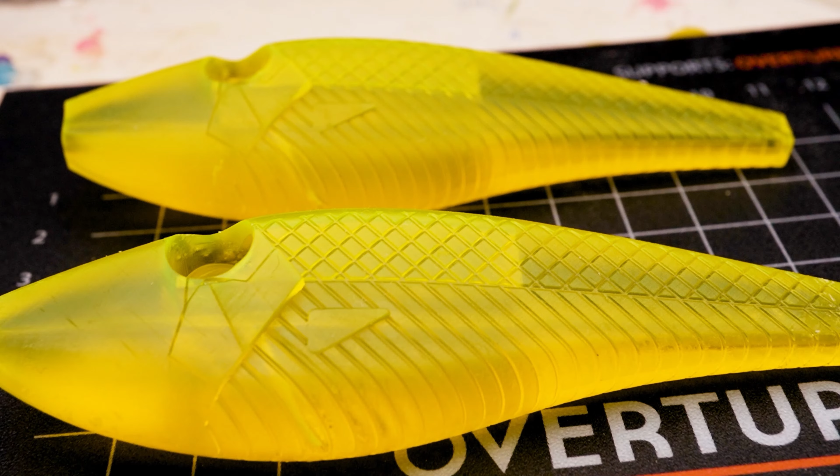Hey guys, that turned out pretty friggin' cool. I hope you liked that episode. I know it was long. Thanks for hanging in there.